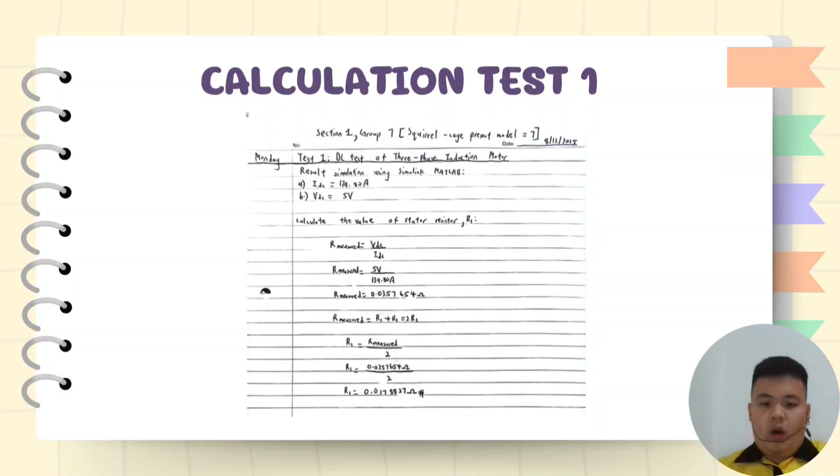My name is Muhammad Zaim and I'm from Group 7. Today I will present about test 2, the block rotor test of three-phase induction motor. Our lecturer is Dr. Hisham and we are from section 1.

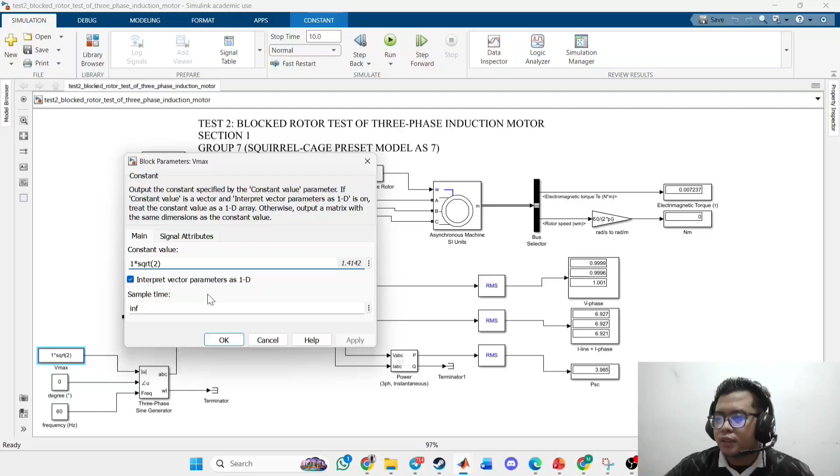Okay, now I will show you our V nominal is 1. This is V nominal 1. Okay, and then our preset is preset 7. So because we are from group 7, this is our preset: 200 horsepower and 460 volt and 60 hertz, and the RPM is 1785 RPM, and then we apply.

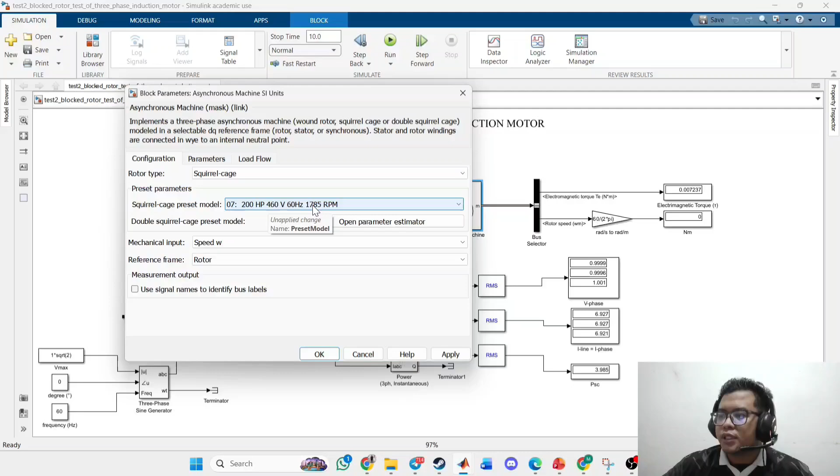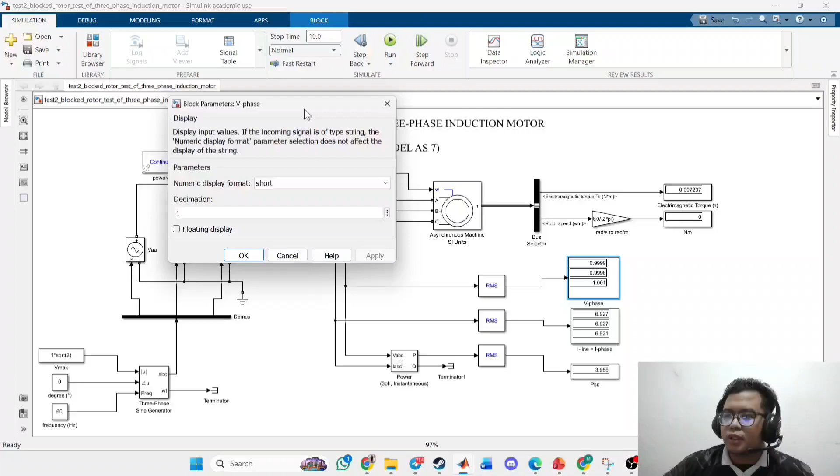Okay, now as you can see, I run it for 10 seconds. As you can see, for the V phase, we got like this is V phase and this is I phase. So as you can see in my report... wait now. So this is my report.

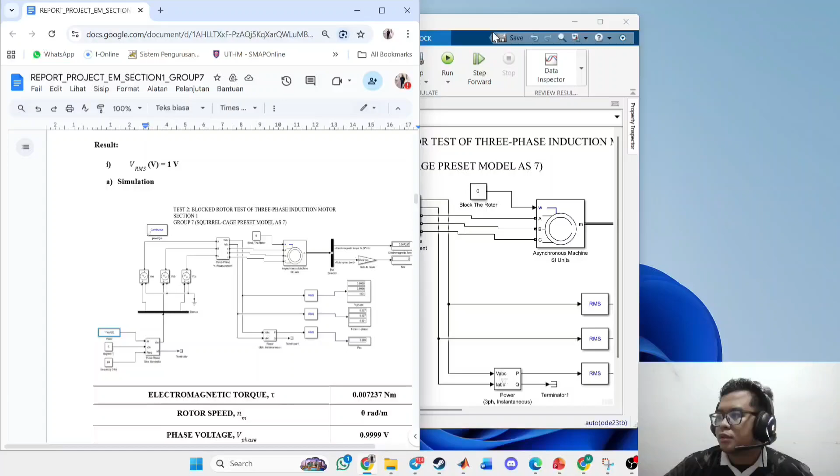So our voltage phase is 0.9999 and our I phase is 6.927 ampere, and our PSC, our stator copper loss, is 3.9 watt. So this is for test 1.

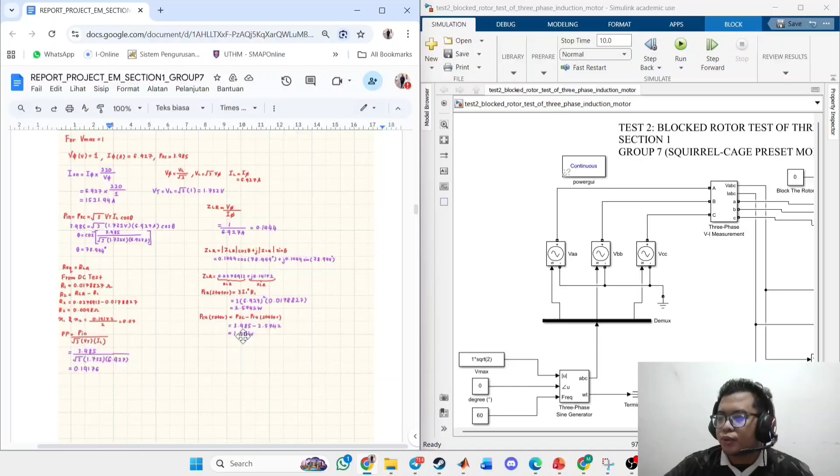Okay, next. And this is our calculation that I calculated. So if you can see, for the PCU stator and PCU rotor, I get for stator 2.57 watt and for rotor 1.4 watt.

And then for the ISC, I get 1523.94 ampere, and for the total V terminal is 1.732 volt, and for the angle is 78.9, and I get 0.144 for the Z impedance, and then I got the RLR and XLR.

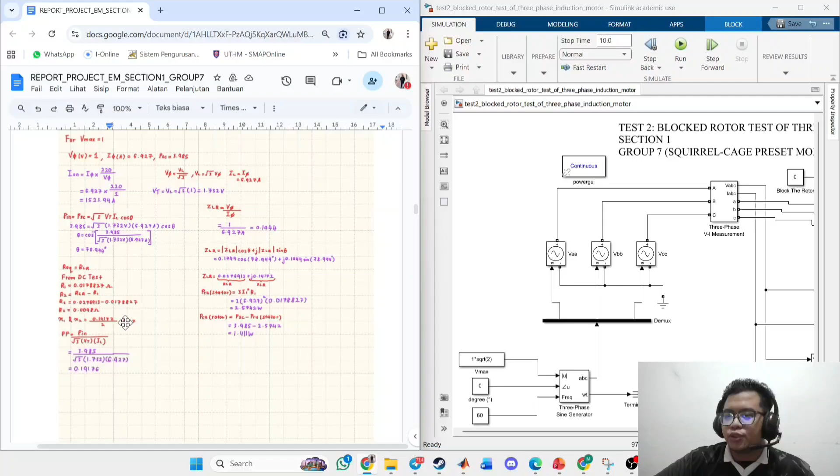So because of that, we can calculate the value of R2 and X1 and X2. So therefore, this is the power factor. I got the power factor is 0.19.

And then we go to the calculation for the VRMS2, V nominal 2. So I will set it as V2 right now. And I will run it.

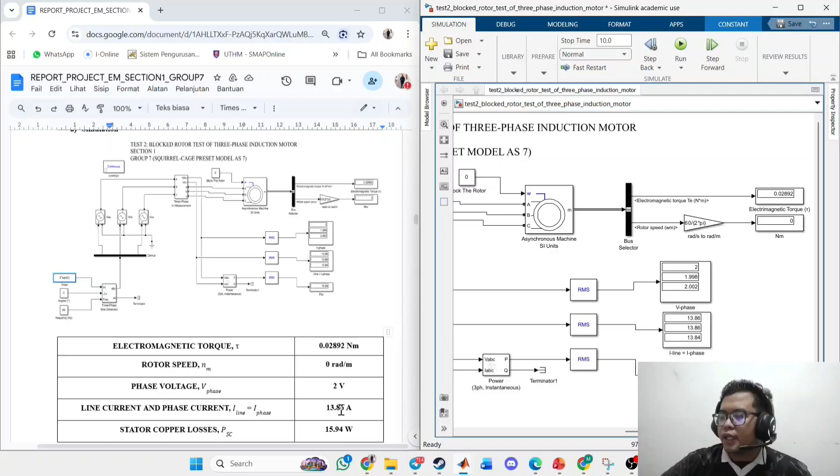Okay, now as you can see, for the V phase I got 2. And for the I phase we got 13.86 ampere, and for the watt is like 15.94 watt for the stator copper losses. And then our torque is 0.02892 Newton meter. So this is my calculation for V2.

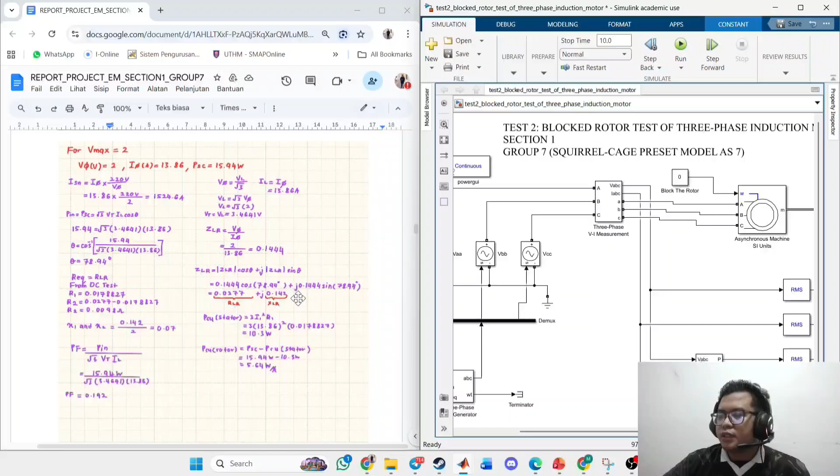As you can see, it's the same as the previous, but the only value that we change is 2. So right now, when we change to 2, the only difference from the previous calculation is the value of stator and rotor. It changed over time. For the VT, also different, and for the impedance, ZLR is the same, and for the angle also same. Yeah, and for the IS, also same. The only difference here is stator and rotor.

Okay, and then next I will change it to 3.

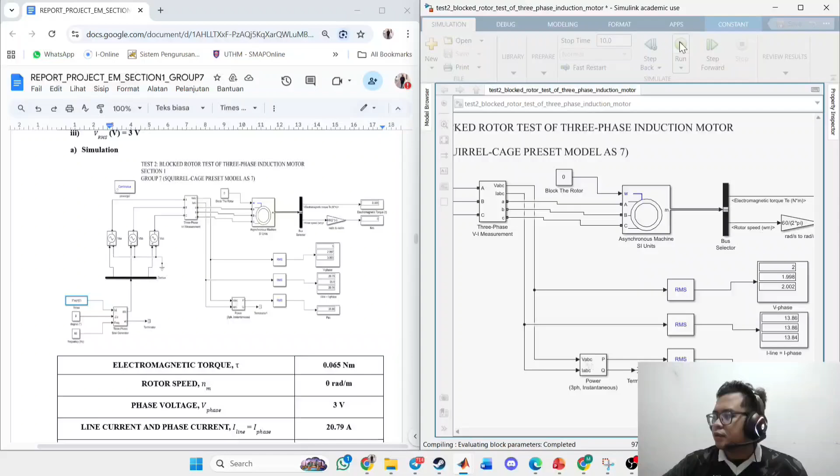Yeah, and then I will run it. So as you can see, my phase voltage is 3 right now because I set it to 3, and then my I phase is 20.79 ampere, and for the stator copper losses is 35.8 watt right now.

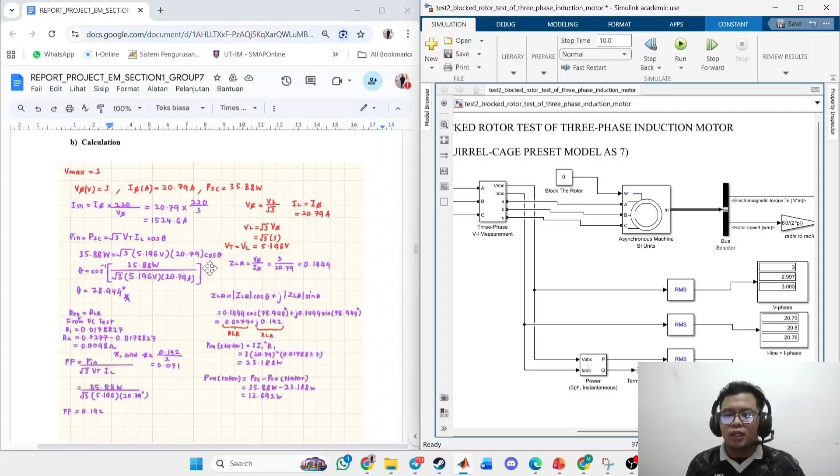And then for the calculation, the difference also comes from the PCU stator and rotor. Yeah, the only difference is stator and rotor. And for the VT also different because we need to convert V phase to V line. So we can get the V line is 5.196 volt. Alright, that's all from me, and the other group will continue my calculation, which is V4 and V5 from my friend. Thank you.

Hello, my name is Mr. Nixon and my ID matrix is CE240148. So today I'm going to explain task 2.

The block rotor test was conducted at several applied voltage levels. The result and explanation for VRMS 1, 2, and 3 volts have already been discussed earlier by my teammate Zaim, including the current behavior and loss characteristics at the lower voltage condition. Therefore, in this part of the presentation, I will focus specifically on the results obtained at 4 VRMS and 5 VRMS.

So at 4 VRMS, the rotor remains completely stationary, giving a slip of 1. The applied phase voltage is approximately 3.999 volts, which produces a line phase current of 27.72 amperes. Under this blocked rotor condition, the input power is mainly dissipated as copper losses in the stator and rotor windings. The stator copper loss recorded is 63.79 watts, and a small electromagnetic torque of 0.1156 Newton meters is generated due to the interaction between the stator magnetic field and the rotor current.

So when the applied voltage is increased to 5 VRMS, the current increases proportionally to 34.65 amperes. As a result, the stator copper loss rises significantly to 99.67 watts, while the electromagnetic torque increases to 0.1806 Newton meters. Despite the increase in current and torque, the rotor speed remains at 0, confirming that the rotor is still fully blocked.

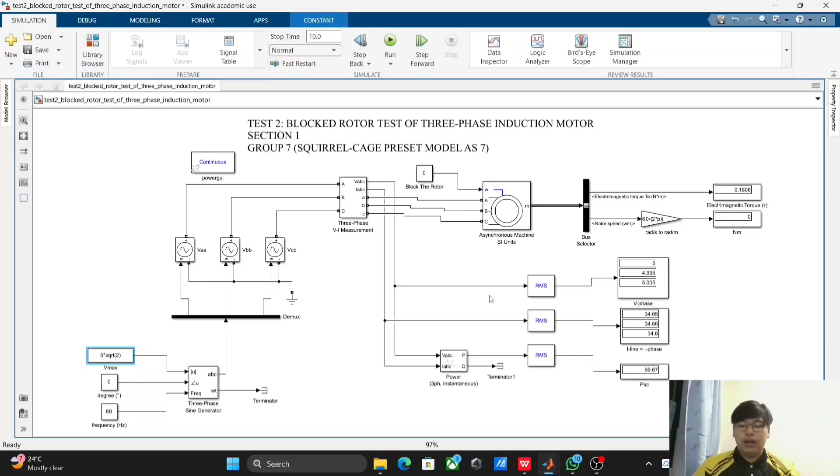So next, I will show the manual calculation for the 4 VRMS and 5 VRMS. This is the value we obtained from MATLAB just now, where for the rotor speed, phase voltage, and line current. So this is our manual calculation.

So for this part, I will explain the manual calculation for the block rotor test. The maximum applied voltage is 4 volts based on the values obtained from the simulation. From the simulation result, the phase voltage is 3.999 volts and the phase current is 27.72 amperes. And the stator copper loss is 63.79 watts. Since the motor is Y connected, the line current is equal to the phase current, which is 27.72 amperes.

So first, the current is scaled to the rated voltage of 220 volts to determine the equivalent short circuit current. Using proportional scaling, the current becomes approximately 1524.98 amperes. Next, the input power under the block rotor condition is calculated using the stator copper loss equation.

From this, the power factor is obtained using the relationship between input power, voltage, and current. The calculated power factor is approximately 0.192, which is relatively low. This low power factor is expected because during block rotor conditions, the leakage reactance dominates.

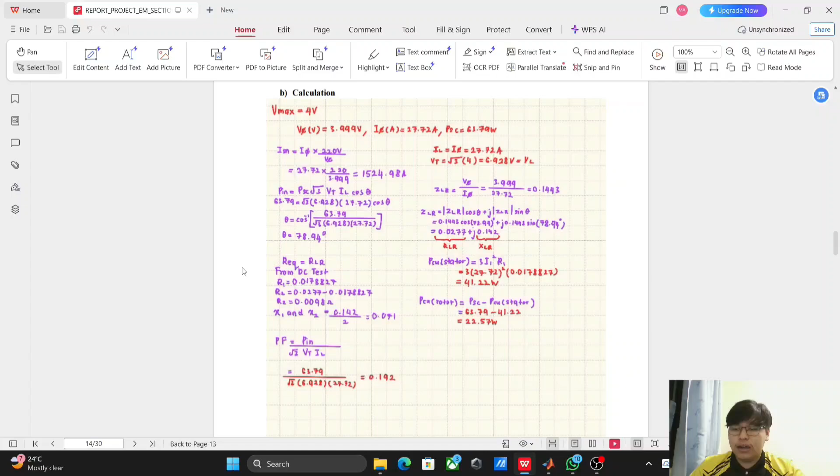By subtracting this from the total copper loss, the rotor copper loss is obtained, approximately 22.57 watts. In conclusion, the manual calculation closely matched the simulation result, and the consistency of impedance, resistance, and reactance values confirm that the blocked rotor test has been performed correctly, and the extracted parameters are reliable for motor performance analysis.

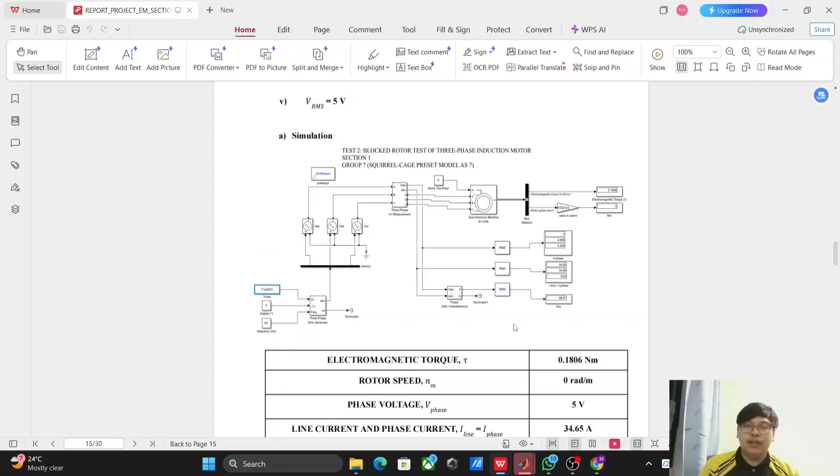The same goes for 5 VRMS, where we calculate and get the same value as we obtained in MATLAB for the 5 VRMS, which includes the electromagnetic torque, rotor, phase voltage, line current, and stator copper losses.

For test three, this test is comparable to the open circuit test performed on a transformer, and is mainly used to obtain the shunt branch parameters of the induction motor equivalent circuit.

During the test, the motor was supplied with rated voltage at rated frequency while no mechanical load was applied to the shaft. Under no-load condition, the motor was allowed to run freely and the rotor speed increased until it reached a value very close to the synchronous speed.

As a result, the slip became nearly zero, causing the rotor current to be extremely small. This effectively makes the rotor circuit behave like an open circuit. Therefore, the input current drawn by the motor is mainly the magnetizing current required to establish the air gap flux, along with a small component to supply core losses and mechanical losses such as friction and windage.

In the simulation, the stator terminals were connected to a three-phase supply at rated voltage, and mechanical load torque was set to zero. Once steady-state operation was achieved, several parameters were recorded from the simulation.

The phase voltage was observed to be approximately 212.3 volts, while the no-load line and phase current were both measured as 63.03 amperes.

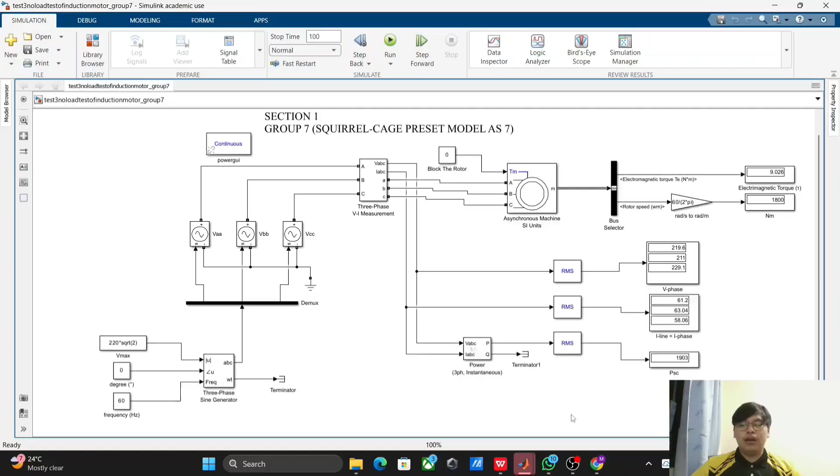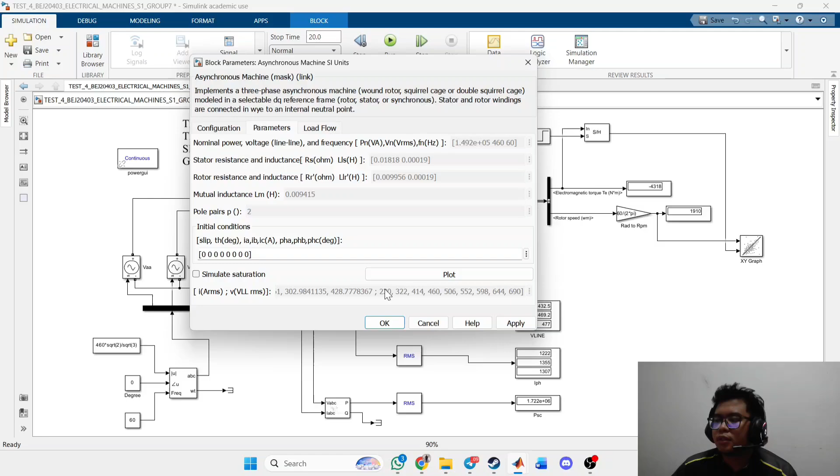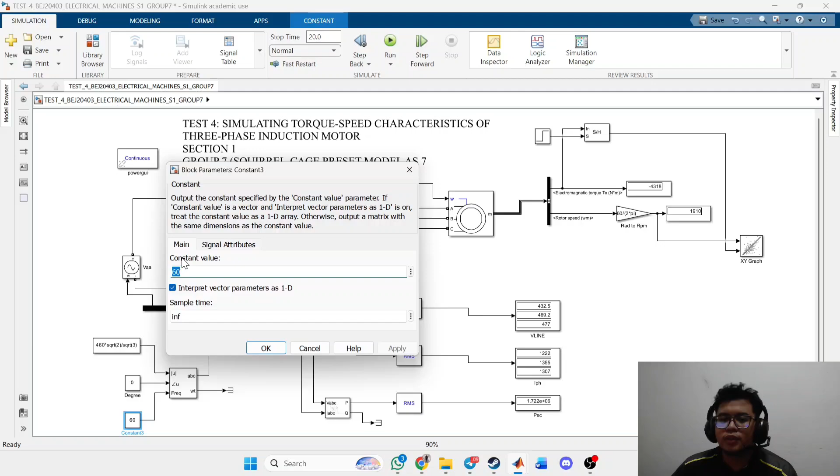And today I will present test 4. Okay, now as you can see, this is our preset, and this is our parameter. Okay, we apply, and then this is our voltage, 460, and the frequency is 60 hertz. Alright, and then we run it.

As you can see, the value we get for electromagnetic torque is negative 4,318. The value rotor speed is 1,910, and then the value V line is 432.5 volts, and for the I line equal to I phase is 1,222, and for the value stator copper losses is 1.722 megawatts.

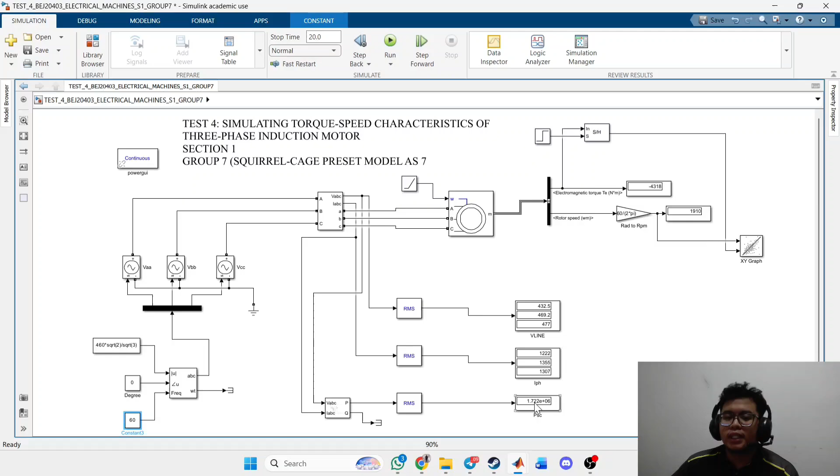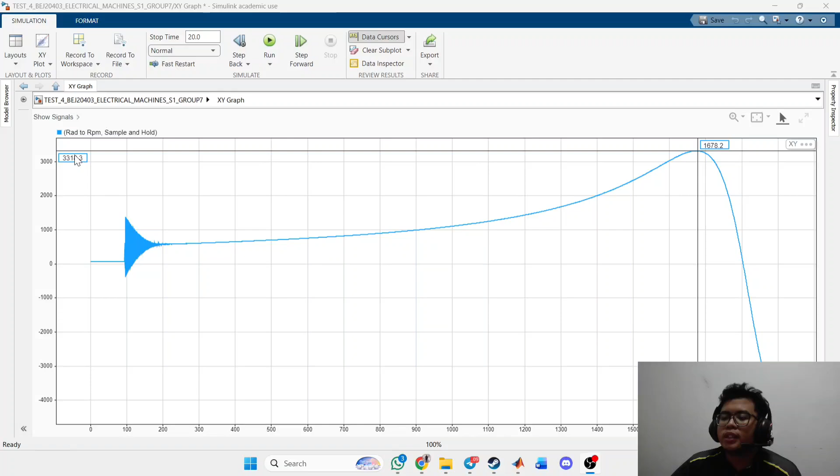So as you can see, this is our graph where the rotor speed peaked at 1,678.2, and for the electromagnetic torque it is 3,318.3. For the rotor speed is 1,678.2 RPM.